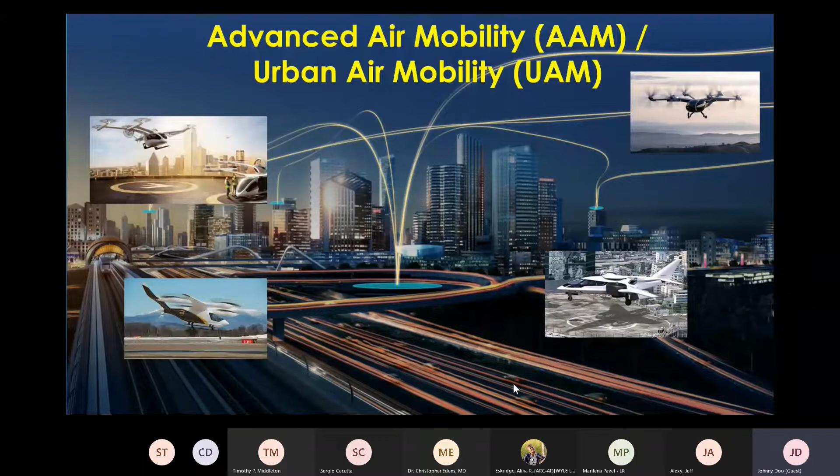And of course, we quite often talk about AAM and UAM. For some folks, it's a little bit confusing. Talking with the AWG team sessions yesterday and the day before, my understanding right now is AAM is the broader, more umbrella coverage of all the possible uses, including fixed wing, electric, any advanced air mobility, vertical flight, air taxi, public service, everything. And UAM is a little bit more focused on the layman's term air taxi type operations, and along with it, the air traffic management operation challenges. If anybody has a different interpretation, I'm all ears.

And of course, for our working groups, including working group 4 here, there's just a lot of advancements in this new world. I remember just 2 years ago, I put out this chart, pretty much just conceptual pictures, renderings. Now, of the pictures shown here, almost 80% are actual flying photos. That is encouraging. That kind of advancement in the aviation industry, I've been here for a while. This is real encouragement.

Now, what I'm going to do is, actually, I'll tell you what. I'll go through this first, and then I'll show a few additional slides at the end. And of course, we can look at the AAM, UAM operations market, which includes quite a bit. Air taxi, multimodal mobility. Not just that we can fly somewhere, but what are you going to do after you get there? You're going to jump into ground transportation, Uber, Didi, whatever, or the subway system connection to the destination. So multimodal mobility is actually a bigger part of the integrated operation.

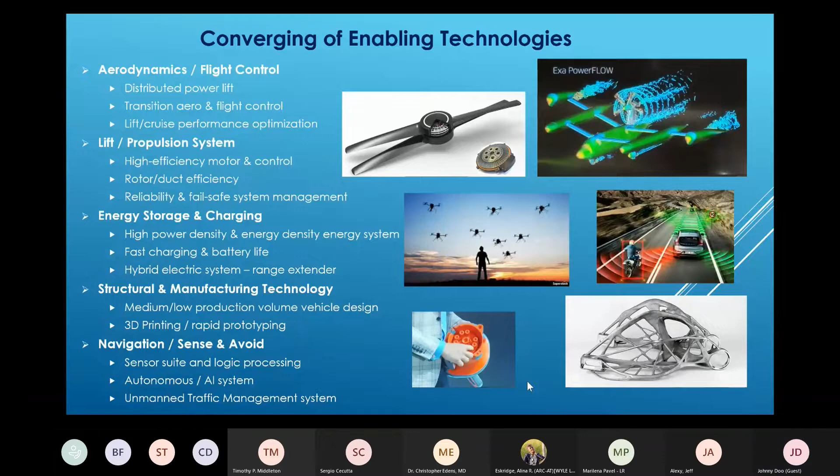And of course, there's a lot of challenges. Certification. We don't have a precedent in how you certify the first eVTOL or the second or the third. And after a few dozen, I think we'll have a well-established practice. The means of compliance, that have to be, in many cases, different than the standard Part 23, Part 27 airplanes and helicopters and so on.

And of course, the level of autonomous operation, simplified vehicle operation, the pilot training. What's the requirement? What do they have to do? What can they actually control? The reversion mode is not the same as the traditional aircraft anymore, because most of the functions are controlled by computers nowadays, at least for the eVTOL.

Of course, longer range development, redeployment, for public service missions. Quite a bit of the challenge is how do you deploy a large fleet at a distance beyond the single flight. Of course, the acquisition and operating cost is going to be across-the-board opportunity and challenges for just about everybody. Any operation trying to use this type of technology will have to deal with that, especially the early stage. At the low volume production, how do you keep the cost down?

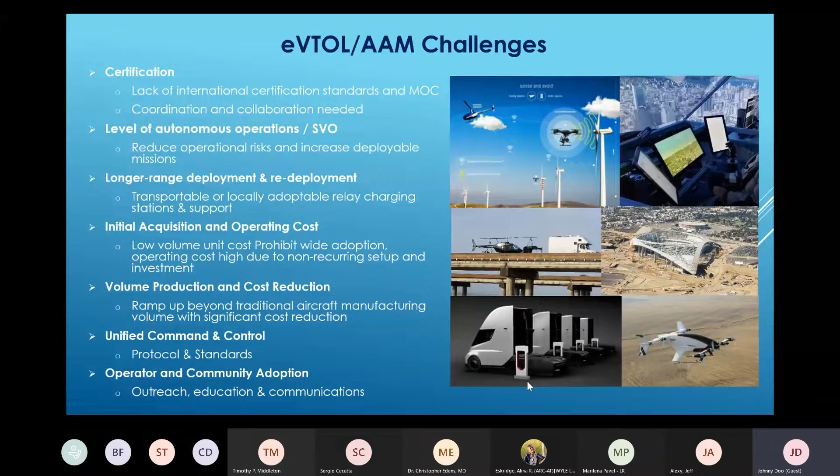Of course, unified command control. Is there a default mode that the governing agency can take over in case of necessity? So just a topic that needs to be looked at. And of course, operator and community adoption. We'll talk about acceptance for the community, but not just community, the general public, but also operators, firefighters, police forces. Would they welcome this thing with open arms, or do you need some convincing education?

So let's look at the market assessment from different sources. One of the very famous studies was by Morgan Stanley, and they look at the total addressable market. That's a huge number. They updated the forecast. I think they first did it in 2018, and then they updated last year in May. The changes of their updates are, generally speaking, shifting more toward the right from a schedule perspective, but the magnitude seems still there.

If you look at that chart, it's an almost overwhelming number. We're talking about trillions. By 2050, a $9 trillion industry. But one thing is important, make sure we understand it's total addressable market, which means not just the manufacturing of the eVTOL, but the operations, the service sector, the maintenance, even, I assume, the person who sells you ice cream while you're waiting for the ride, that's part of the total addressable market. So got to understand that part.

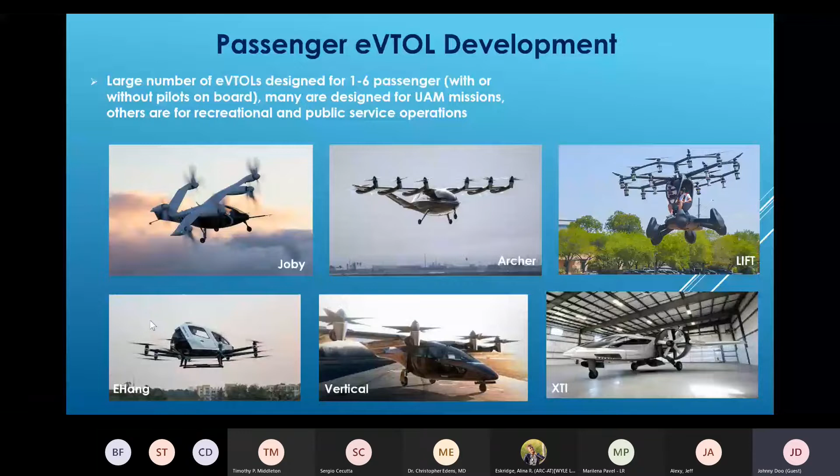And of course there's quite a bit of advancement - Elroy showed their latest version of the vehicle. I think the picture may actually be one version older, but there's quite a bit of effort and advancement in the cargo type. So if you look at the previous charts on the market forecast, it makes sense that more and more companies are looking at this market segment.

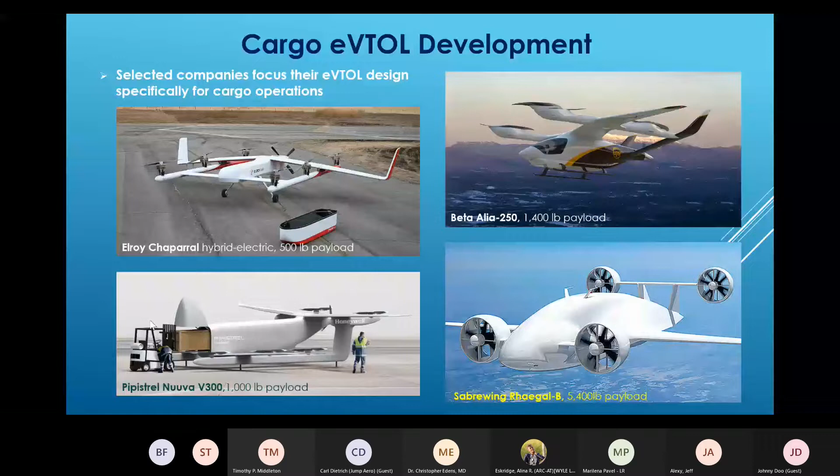And of course they say, okay, how many aircraft are we talking about? Well, depends on who you believe. Morgan Stanley is thinking about 2,200 passenger eVTOL production by 2030 - that seems achievable. Now we start looking at 14,200 units by 2035, that's pretty interesting, it will be great. But guess what - 76,100 units by 2040, and that's the US market only. That is a huge, huge, huge number. If that realizes, that's why we're saying the total addressable market may overshadow the current airline industry altogether.

And I just want to mention another quote from Roland Berger - they're thinking by 2050 it will be 100,000 passenger drones flying around. Just for your sizing and reference consideration. The number will end up wherever it's going to be, but either way we're looking at probably very large numbers compared to the traditional aircraft industry.

So just for comparison, Airbus forecasts 39,000 airplanes over 20 years - they're normally pretty good at that prediction, the demand, replacements and so on. Look at the general aviation industry including helicopters - the chart on the left is current data from GAMA. We only hit 3,300 airplanes a year over the last 10 years or so. But can we build a higher number of airplanes? If you look at 1978, 1979 data, we were at 18,000 airplanes a year. So is it not possible? I'd say it's definitely doable - just a matter of how we're going to go about doing it.

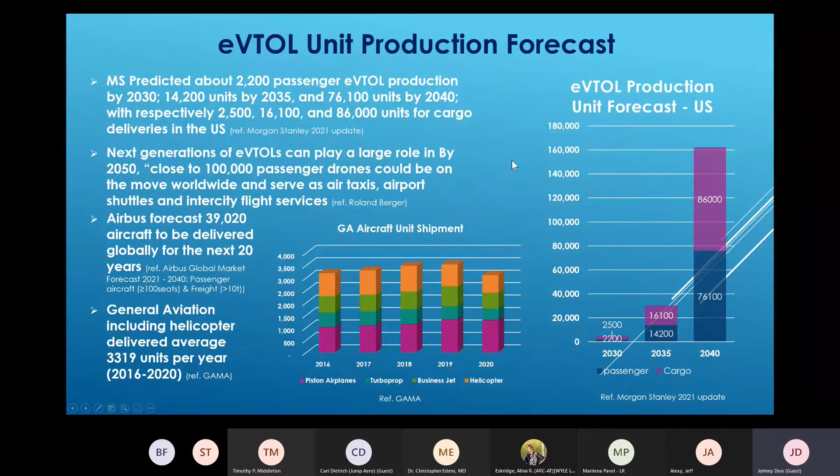And just for comparison again, if we look at the helicopter market, currently the total operating fleet is 32,000, and 39% is in North America. But piston seems to be growing. I take a little hint on that and say, you know, cost, affordability, and availability may be very important for people operating vertical flights, even in a traditional helicopter world. So that's going to be interesting.

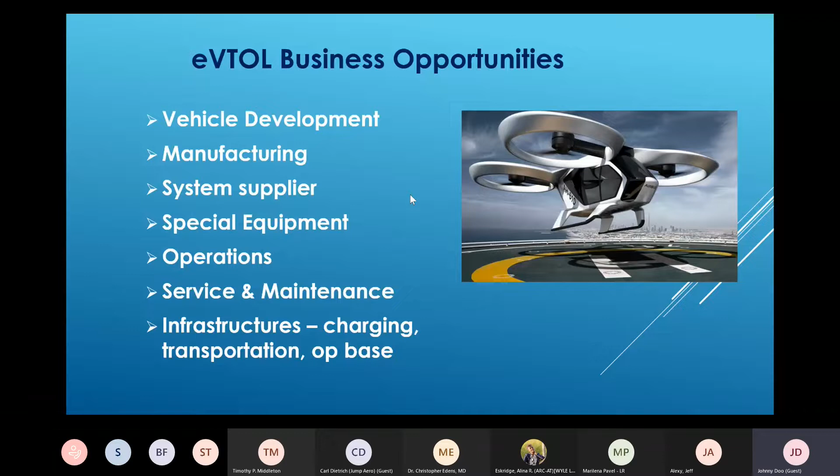Of course, we can talk about an analog approach. Say, okay, where is the business opportunity? Vehicle development, manufacturing, system supplier, special equipment, operations - big time actually. Service maintenance, infrastructure, very important. Charging, transportation, operating base, whatever. So within that, each topic has a huge amount of different diverse business opportunity. It's a huge ecosystem in my mind.

And of course, platform and mission capabilities. What kind of platform are going to be in high demand? I guess the market would tell us. I put a picture down below showing that from the foldable, truckable, or fold-arm concept, you put it into the cargo container, ship it anywhere around the world, and put it out for deployment. That kind of application definitely will be attractive for many government uses for sure, public service, and also even for commercial business. So we'll see how the market takes us.

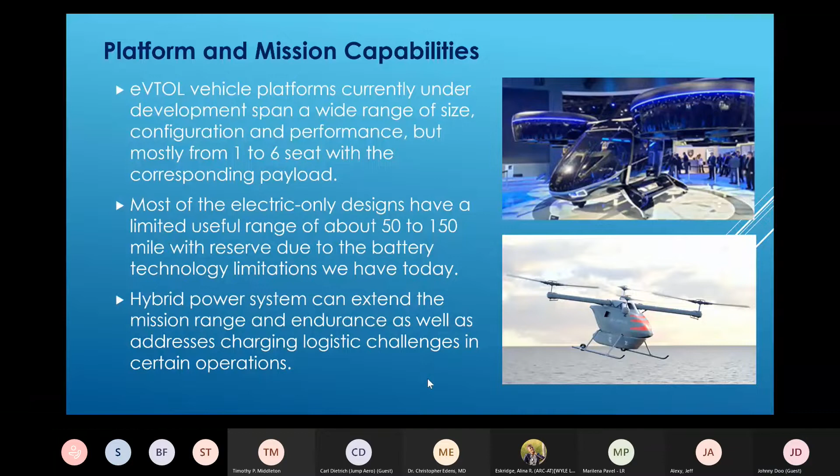And of course, one of the key things I want to make a point of - I think I'm preaching to the choir here - is that while the technology is seeing a lot of advancement, certification is going to be challenging because right now FAA, EASA, Transport Canada, CAAC are not quite synchronized. A lot of effort is being put in to try to synchronize it, but because it's so new, it's going to be a little while before we can start to converge again. So it can impose some challenges for OEMs and suppliers on how to certify this new different concept and operating systems, logistics, service, maintenance, flight training, and so on.

So I'd like to say that certification will back-drive the design concept and details. If we don't look at it that way right at the beginning, right at the start, companies will be forced into major design changes, which takes time and money and whatever. So it will take some real innovative ideas and operations and concepts coupled with proven certification practices - that may be the best way forward.

And since this presentation was talking to the advanced material folks or industry, I brought a few slides about cost-effective production manufacturing. I think the market demand and forecast is one of the challenges because, as I said earlier, we had to design a vehicle and select the supplier and technology partner to focus on a specific target production rate, because if you're too high or too low, either way can be challenging - it could cost initial price too high or require too much upfront investment.

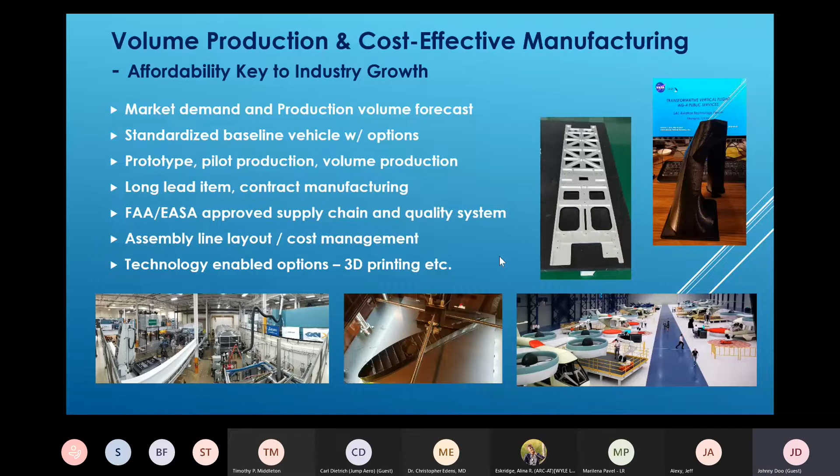So it's encouraging. Of course, one of the developments needed is infrastructure and operations. How do we do that? I mean, vertiport operating system - where do you put the vertiport? How about the local blockage of GPS signals in the urban canyon? The flight path, the clearance for in and out of the passage.

Are we going to have a dynamic and flexible airspace management system following a certain corridor? FAA is looking at initially a rigid corridor, now looking at dynamic corridor as-needed concepts and so on.

So we'll see. But charging, it's going to be big time, right? Fire safety, charging and high power. Do we have enough power grid capacity to do that?

And of course, SVO training, facility licensing, spare part logistics, maintenance and operating training. Do we have certified A&P mechanics at each site? Is that practical? Do we need that? How do we operate that? So maintenance and operation training.

And of course, a distributed on-demand service and maintenance system. Can we have that kind of dynamic operation, therefore come with a dynamic service support system?

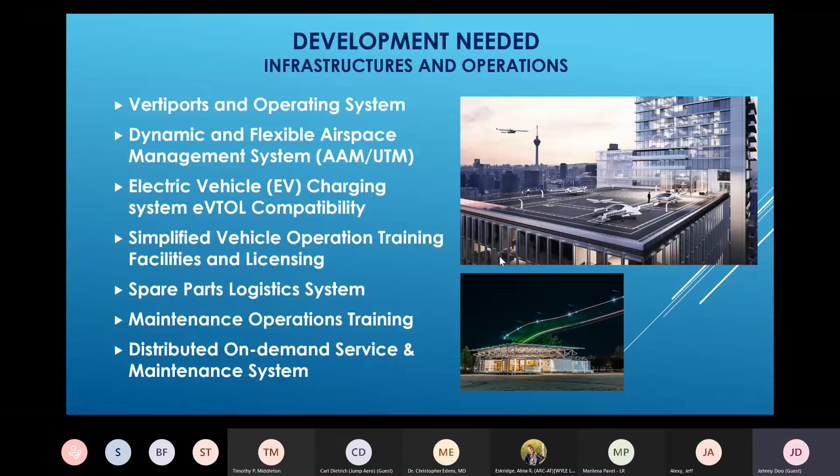And of course, autonomy training, airspace management, to me, is one of the most interesting and most challenging aspects. Not just the eVTOL flying around. eVTOL has to share the national airspace system with the commercial airlines, the legacy helicopters and fixed-wing airplanes, GA sectors, and forthcoming tens of thousands of drones for various applications, with a passenger cargo eVTOL operating in the mix.

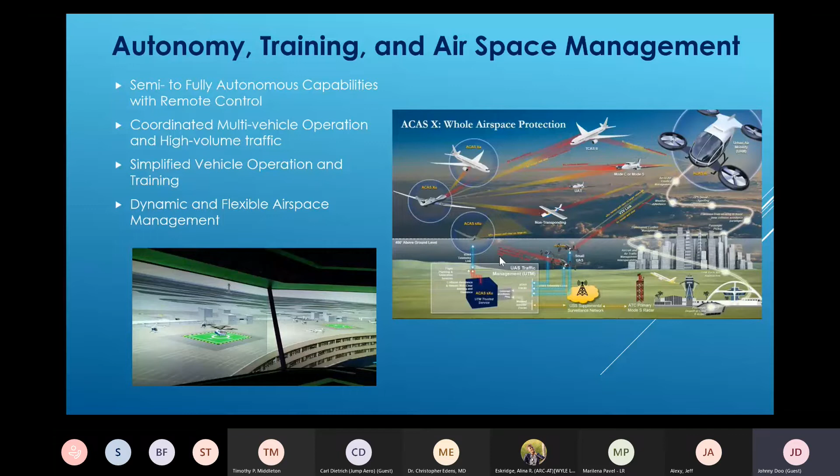So NASA FAA has been working, I would say, impressively fast-paced on this, developing the concept, this network, the system. But it's going to be a big, all hands on deck type of effort.

And of course, composite technology is, to me, one of the key elements for producibility, not the traditional high dollar approach, but I'm more thinking about perhaps higher volume - identify which part of the structure is truly strength critical, where you need true high performance material and processes, and which part of the vehicle is stiffness-driven design, where you don't have that critical need and have a good opportunity to trade off.

For example, thermoplastic composite, the potential promise of 10-15 minute processing forming time versus 3 to 5 hours, or 10-hour processing time with autoclave.

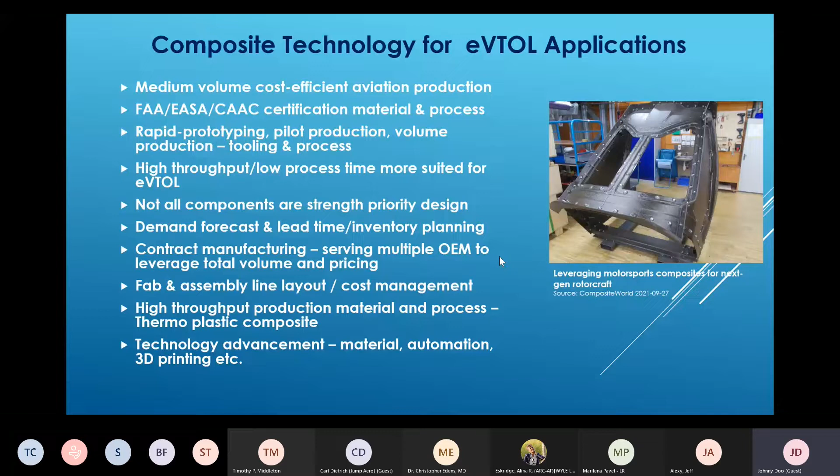So we have to look at the lessons learned from previous capability and performance, for how do we develop product and processes for tailored medium to high volume production platforms and systems, like the picture on the right, that leverage the motorsports composite methodology for development purposes.

And of course, the possibility is looking at a lot of elements of the eVTOL that could be and likely to be composite. And I don't think it's one composite fits all - it's going to be many different kinds. But one interesting thing is that I think for the industry as a whole, we really need to try to establish down to a few really, really promising, most suitable materials and processes.

Especially out of the autoclave process and so on. The reason I say that is because if 200 OEM companies want 150 different kinds of materials, to me it's a waste. There's no reason that 200 different designs require 150 different process materials.

But if we can consolidate that down to a dozen or so, then from certification, from testing, from standard database and so on, the industry can really, really help each other out. So that would be my 2 cents on that.

So I ask, what is the size for the composite or advanced material market? Just in the US alone, I would say, if composite airplane, eVTOL airframe assembly cost is about 10 to 15% of the production OEM cost of the whole aircraft. And let's assume each unit production cost is around $700,000 per unit.

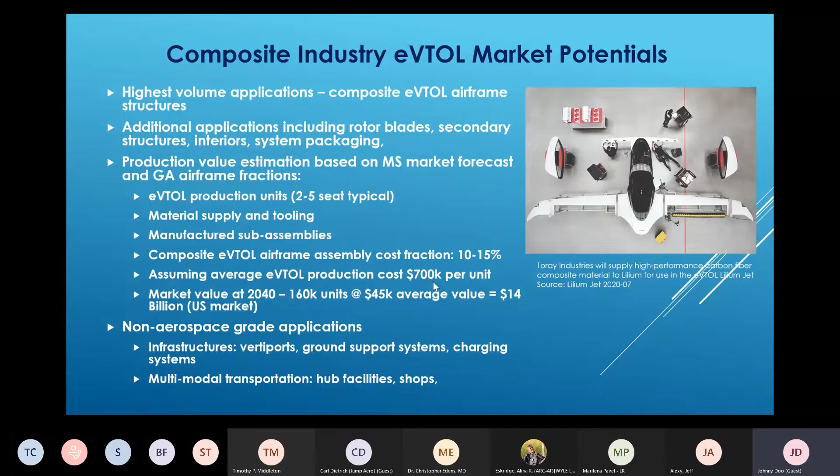And of course, as I say, it really needs to be certifiable, right? All the process, the control, the temperature, the resin, the deviations - people who have been through the certification process know we have to take, in many cases, the lower performance band of each step, each process, each variable, and that takes away a lot of performance from the certified material.

And if we can make the material and the process more consistent with smaller variations, the same material can mean more - we can take more performance out of it as certified. So we will see, but as I mentioned before, the flow time is critically important. The cost of the raw material and the process itself, as well as the tooling cost - how long can a tool last, how many units can you amortize it over?

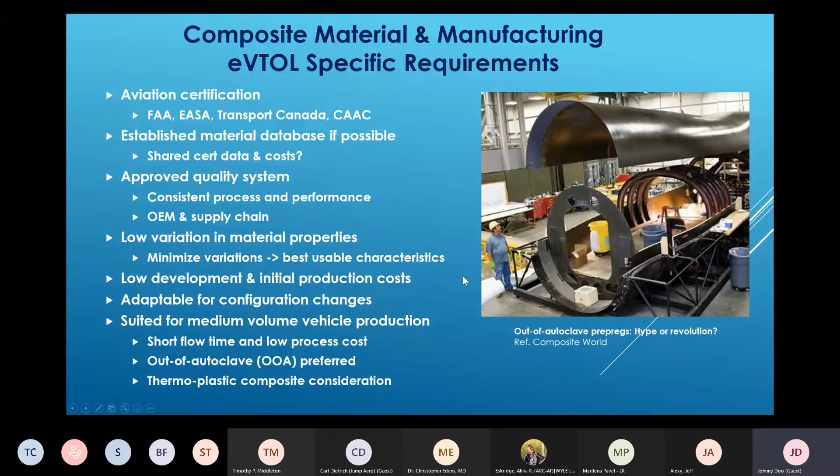And of course, anytime we can look at alternatives to autoclave, like thermoplastic composite, would be encouraging, would be desirable. And of course, there are a lot of challenges - too many projects, OEM potential customers.

As a material supplier, who do you work with? You can't work with 150, 200 companies at the same time. Of course, it has to be aviation grade, it has to be certifiable, the production control, traceability of the process of fabrications, and what rate do we target the specific process or material for? How do we certify, what kind of testing, from the element to the component to the sub parts, the full assembly to the whole aircraft? Everything costs money, so any time we can share, it will be nice.

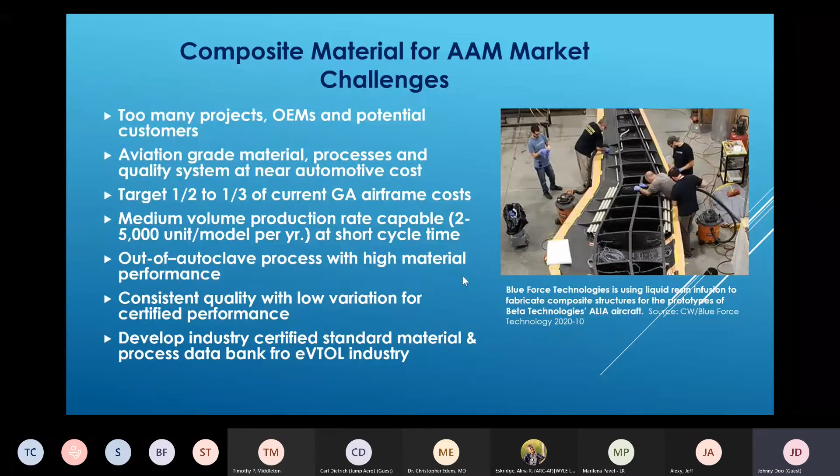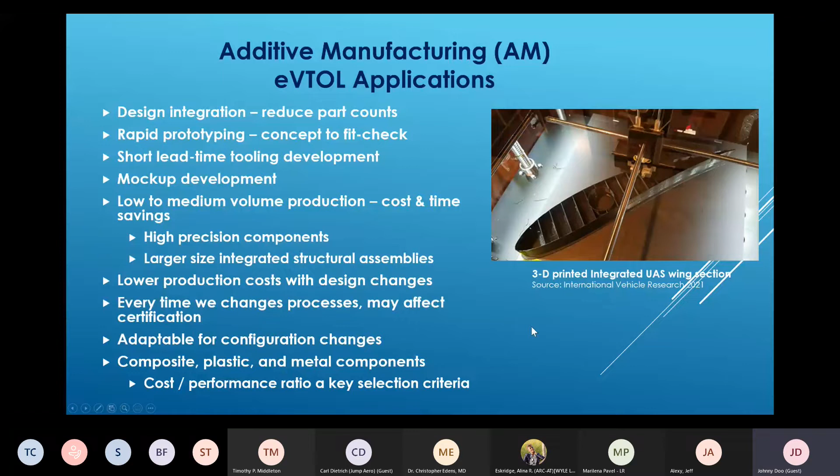Of course, additive manufacturing is dear to my heart. That's a picture I took on one of my UAV wing section constructions. The interesting part is, I can make a single part with all kinds of structural elements and subsystem installation, and really end up lighter and cheaper. So, with my limited hands-on experience, I would say that the possibility is endless. The whole industry is moving forward with continuing adding materials, including metal, plastics, composites, and so on. Even long fiber may be forthcoming, so we'll see.

All right, so that's basically my summary for some of the thoughts and ideas addressing the overall market and the target applications, and the potential advanced material market segment opportunities. Now, of course, I have to take the opportunity to introduce all the working groups. Back in January, working groups 2 and 3 had not quite finished the consolidation yet, and now working group 2-3 is one integrated team. So encouraged by that progress.

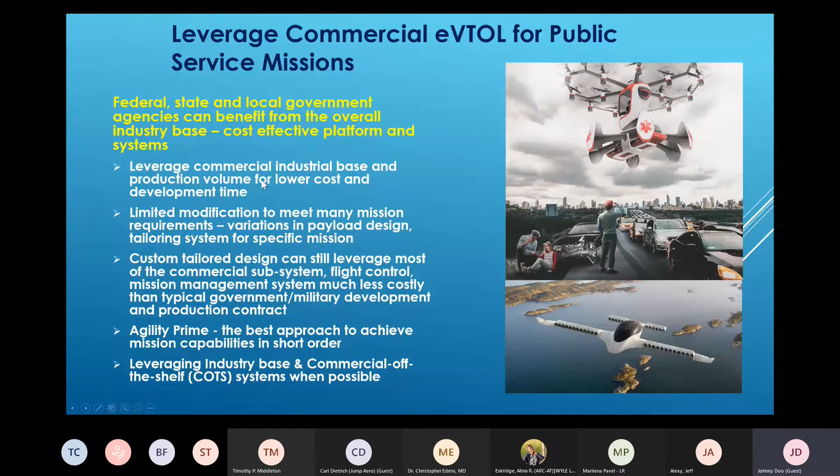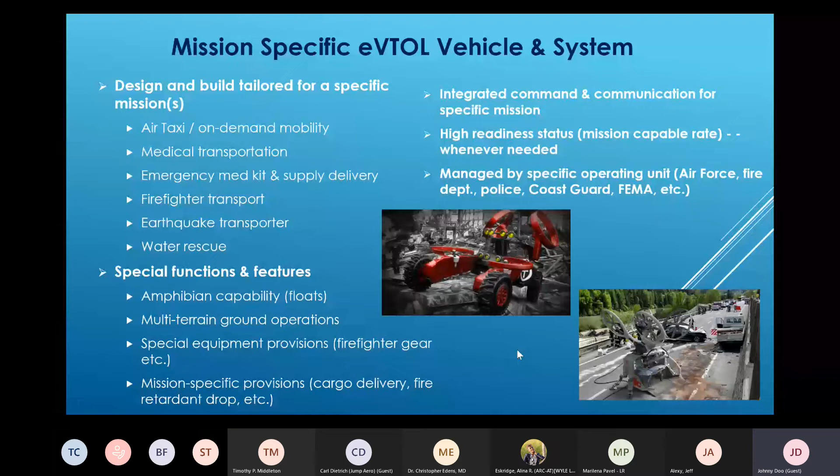And of course, I have to show that there's challenges and development needed. But with challenge and development needed, that comes with our business opportunity. So it's really actually not always bad, right? And of course, there's some vehicle-specific capability we need to develop. And of course, autonomy, training, airspace management, especially in emergency operations, also need to be attended to. And of course, operation, logistics, and support.

You can't just get the people and the vehicle to a location. You've got to continue to support that in order to enable ongoing operations. And of course, unconventional operation mode evaluation. We really need to get some of the OEM platforms into the operator's hands and start with simulated operations and then maybe pilot test operations and so on. Because I'm a strong believer that only when we really go use it, we will then know how to improve the way we use it, how to improve the platform, what kind of other changes we may need, et cetera. And of course, funding acquisition, acceptance is always important, don't take me wrong.

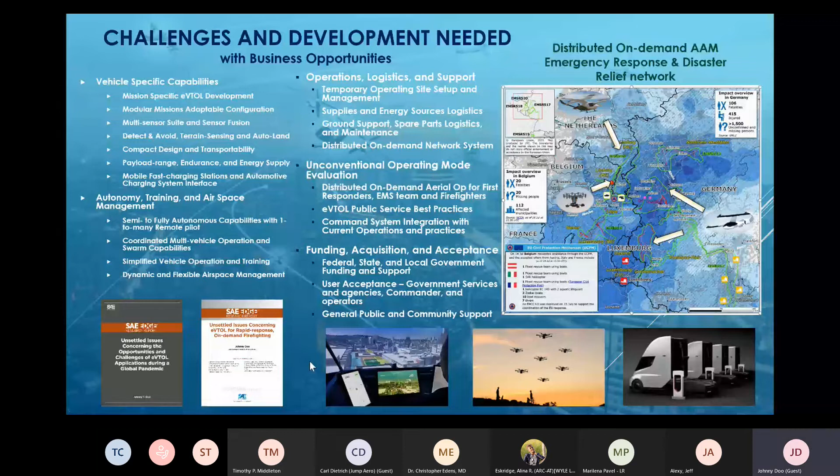Okay, so moving forward, total ecosystem. What is this? As I said, this is really a complete ecosystem. So is it fiction or reality? I'm pretty encouraged. If I were to put my 2 cents in, I say it's coming, and it's opportunity, a lot of opportunity, and a lot of challenges. I'm not going to go through too much detail here, but leveraging innovations, I think, is going to be a key to make this whole industry realized. But if you look at some of the predictions, even if we take the low end, it's still a huge industry. So I'm encouraged by it. So I'm open for what you think.

By the way, just a couple more slides. At the conference, the moderator asked me to introduce myself. Some of you know me better, but I'm not sure you know what I did in the past, so I put a few pictures together. That's some of the aircraft I worked on. In the upper corner, that's a special mission side-looking array radar platform, a Swedish project mounted onto a Metro airliner. And that is a 49,000 feet, Mach 0.83 cruise capable business jet, 2,500 nautical mile range. It's the only one in the $10 million or under price range that I know of that can go from San Francisco to Honolulu without landing in the water. So that's some of the airplanes I worked on.